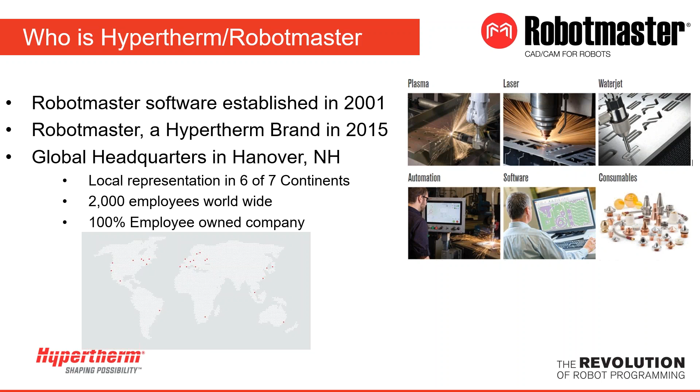Hello, my name is Greg Culp, and I'm a Senior Software Sales Manager at Hypertherm Incorporated, RobotMaster Software. Our goal in this presentation is to highlight how offline robotic programming has evolved over the years.

Since the beginning of robotics in the manufacturing space, the manual teach pendant has been a prominent player when it comes to programming and is still widely used in today's robotic market. Just like everything, there can be several advantages and disadvantages when programming in this way.

As I stated earlier, the manual teach pendant is still widely used in today's market, making it easier to find people that have a baseline understanding of this method of programming. Manual teach pendant is a highly flexible method of programming and can be beneficial for simple applications such as pick and place and material handling. Because of the flexibility of the manual teach pendant, it has allowed robotics to be used in a wide array of applications. Moreover, since the robot is being programmed online, the need to have an accurate robot tool center point or user frame is not an issue.

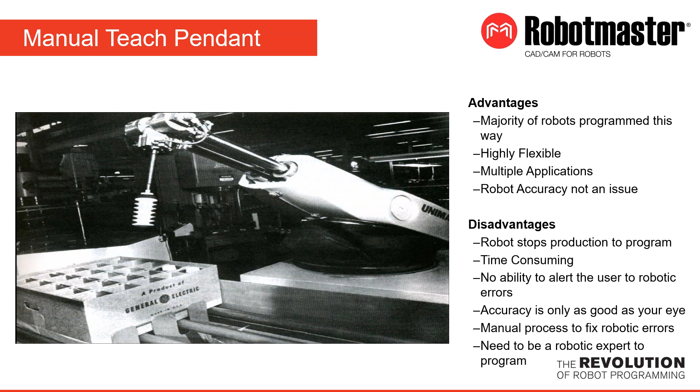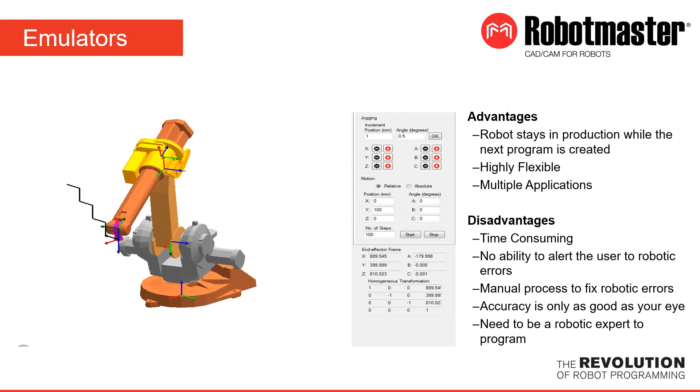Just like any revolution, progress is made with a single step, and we saw this with the creation of offline emulators. The emulator allowed the customer to keep their robot in production as you were creating the program. Even though this was a big jump in manufacturing productivity, keeping the robot in production, this is still a very manual process. The emulator is essentially just a manual teach pendant behind a computer screen.

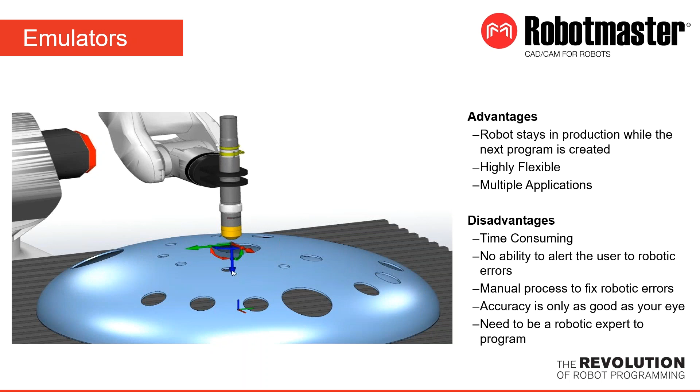You still had all the flexibility that came with the teach pendant programming, but also got some of the same drawbacks, such as accuracy issues, as your program is only as good as the person's eye. Since there's no intuitive method in this programming, people still are spending much of their time manually fixing robotic errors and needed someone who is well-versed in robotic programming to complete this task.

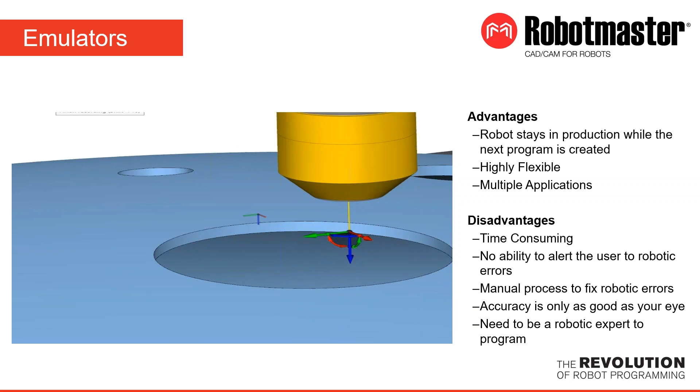One of the things that propelled the robotic programming market forward is the shift from low mix and high volume to high mix and low volume. No longer are the days where robots are mostly used in situations where we'll be doing the same things hundreds of thousands of times, but the shift to using them for runs of 1, 10, maybe even hundreds. This made the need for faster programming even more crucial.

When you are going to run the same part for a year and you're going to make 600,000 parts, it doesn't really matter if it takes you a few weeks or a month to hand program it. You still have an ROI to use the robot. Now take that same timeline for programming a run of 10 and the robot is no longer profitable. This led to the first generation of offline programming software.

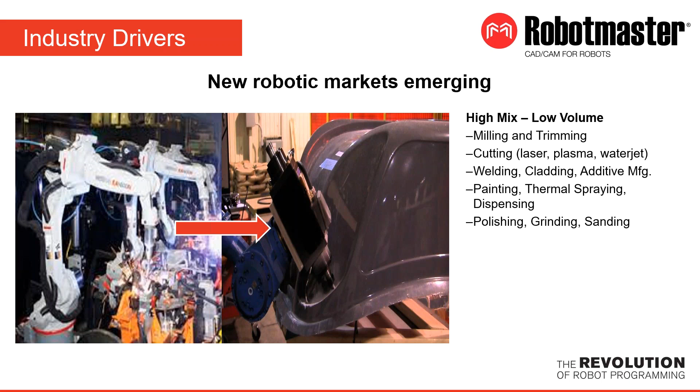Now, as robotic applications progressed and got more complex, people started to push for a simulation environment that could interact with a CAD model. With the introduction of the first generation of offline programming, this allowed you to do just that. Now you had the ability to interact with your CAD model inside the simulation, enabling you to snap a point on the model and follow the exact edge, not deviating from it because you were using your eye.

Once again, this method of programming sped up the process and kept the robot in production. This new approach was also more accurate than the emulator and teach pendant. Even though this was a big step forward in robotic programming, it was still very time-consuming.

The user was still doing point-by-point programming on the part and needed lots of back and forth between the offline programming software and the robot. There were still no alerts for the robotic errors, and you still needed to be pretty well versed in robotic programming to use the software.

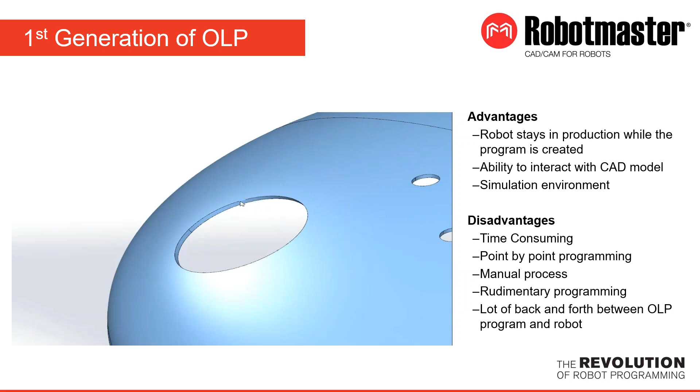The next logical step in the evolution of robotic programming was asking the question, if I can interact with the CAD model to create points on a part, why can't I use the offline programming software to create the robotic path off an edge of the part?

This second generation of offline programming software allows the user to grab the edge of the part using all the information that's already in the CAD model to get all the correct tool vectors to make the program much more straightforward and a lot more accurate.

Even though this generation of programming was a giant leap forward in time savings, it still was lacking a lot of capabilities to get an error-free program. There were still no kinematic checkers or solvers and not much in the way of collision warnings.

Like we talked about before, anytime you gain speed of programming, the cost is flexibility. This second generation offline programming software sped up the programming time for edge following applications such as trimming and deburring, but the constraint of programming off an edge cut back the total amount of applications this style of programming could do.

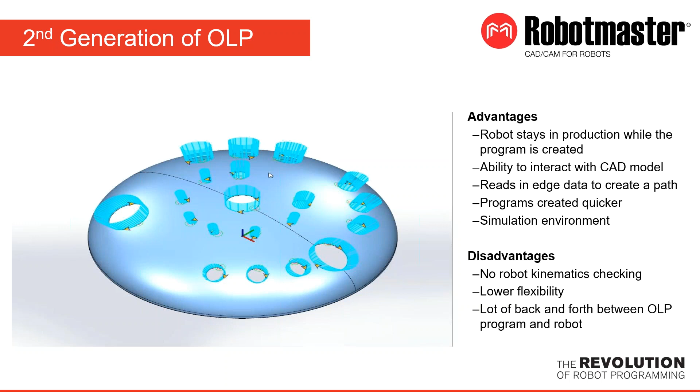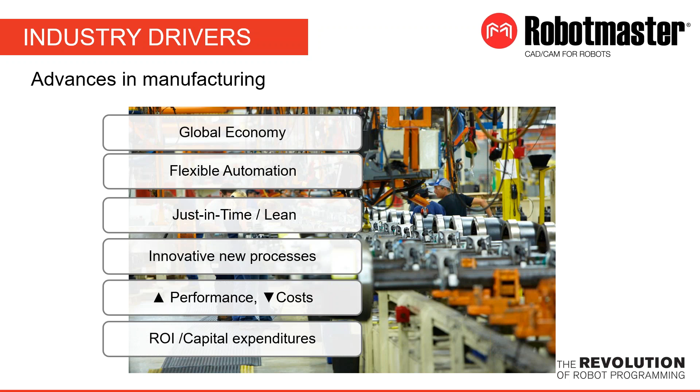There became a point when companies had several CNC machines in use, and they were starting to implement more and more robots, not just for material handling applications. Applications such as water jet cutting, trimming, robotic welding cells were being installed, and people started thinking, why can't we use our CAD/CAM software to program the robot? And this is where you started seeing some overlap between CAD/CAM software and OLP software.

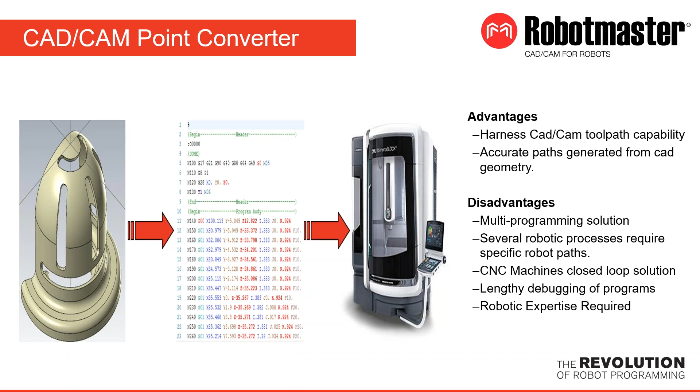The main difference between using CAD/CAM software for CNC machines and robots is CNC machines are straightforward, a closed-loop environment. And when it comes time to programming your robot, there are a lot of challenges, like singularities, reach, joint limits, and so on, which are not intuitive to identify or solve. Robots are more flexible than CNC machines, and this is a positive. But with flexibility comes more challenges, and those challenges needed a higher level of expertise in robotics.

So how this worked: in the early days with CAM software, you would create a point file. You would then take those points and read them into a point converter, which would create 6-axis robot code. You would take the robot code, run it through a simulator to figure out your errors. This was a lengthy process and took a lot of debugging to get the robot cell running. Keep in mind, you needed a lot of expertise in robotics to make this work.

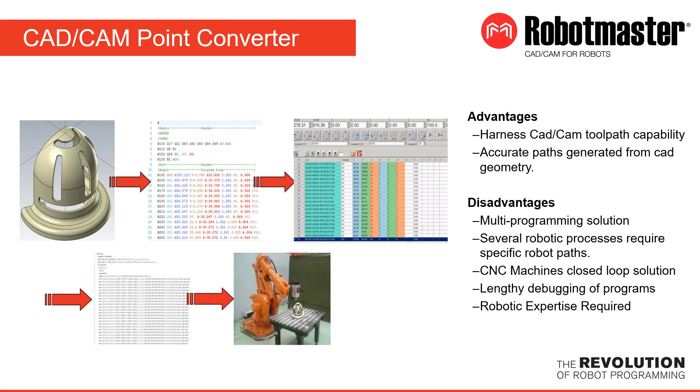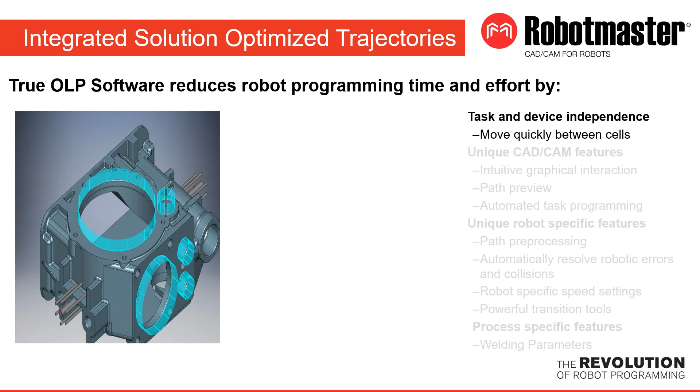After the CAD/CAM point converter approach of programming, the software transitioned into a true robotic programming solution. When looking at robotic software, there should be several factors that come into play. Your software should be robot neutral, with the ability to work with many robot manufacturers in the industry. The software should not be designed for a CAD/CAM expert or for a robotic expert. It should be designed around the process expert. If you understand your process, then programming the robot should be easy. You need the ability to move quickly from your task environment into your robot cell environment. Being able to create multiple tasks on a part is critical.

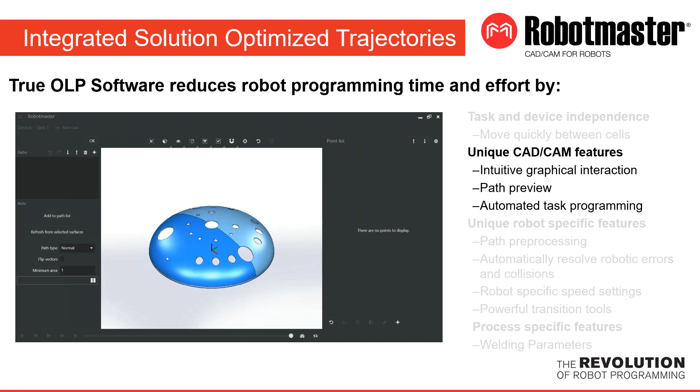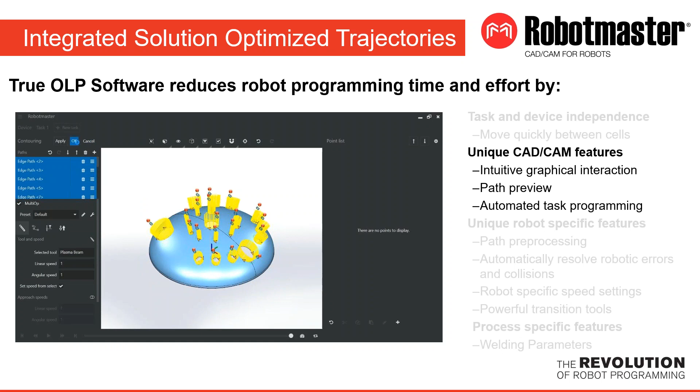In this video, it is showing automated part selection on a CAD model. Take notice of the graphical feedback from the software to the operator, having the ability to order your path to reduce cycle time. Once the path is created, you should be able to transition quickly into your device environment, simulating your robot to find out if you have any robotic issues or if it is good to go.

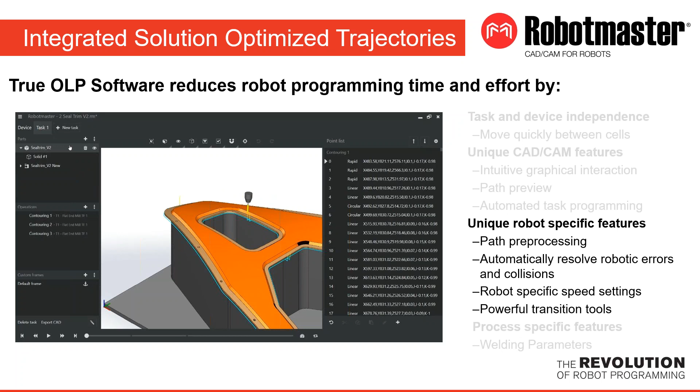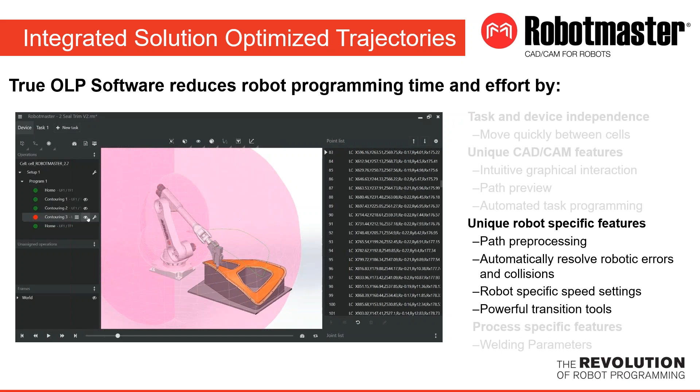Being able to manipulate your data for start point, cut direction, entry, exit, and so on is also important. You will notice graphical feedback right away. Path pre-processing lets you know there is an issue. Not being a robot expert, but a process expert, helps understand the issues. Features like inverse kinematics and engineering tools like workspace analysis help evaluate the robot cell with the part, and also having the ability to resolve your robotic issues and path corrections for an error-free program.

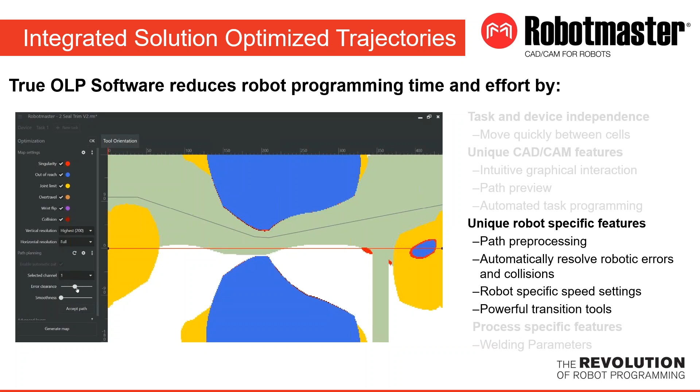These software tools are revolutionizing how robots are programmed today. So what you are now seeing is a collision between the torch and the part. In the past, the operator would go back to his parameters and start changing the data. Having a powerful interface and graphical transition tools, the operator can work directly within the robot environment to fix any of his issues that he's having for an error-free program.

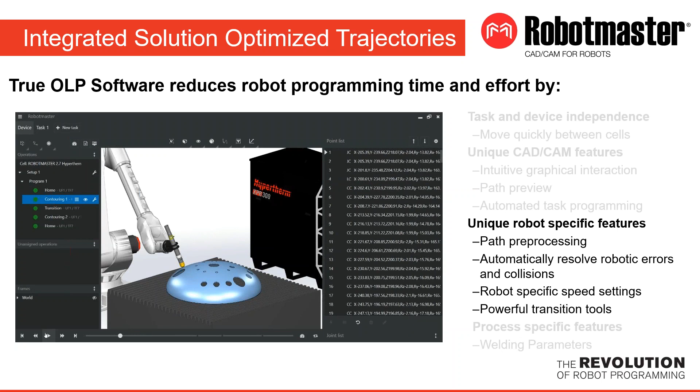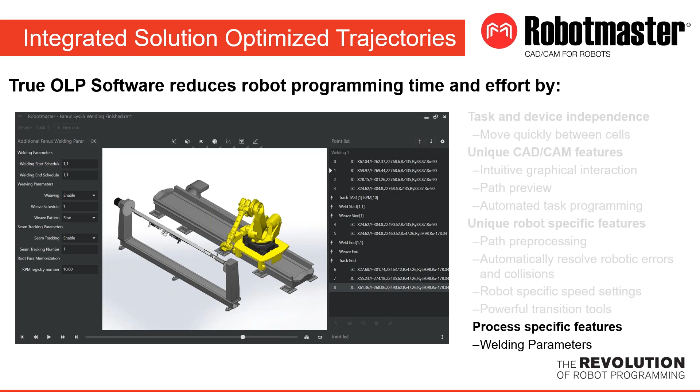And lastly, we should be looking for process-specific parameters for your application. Let's take welding, for example. Being able to input weld schedules, weaving parameters, seam tracking, and other commands determine if your software is a good fit for you and your application.

So let's recap. You now have a timeline of how software has enhanced over the years as robotic technology has enhanced. Offline programming software is another tool in the toolbox. When it comes to getting your job done, there are many factors that go into true robotic offline programming solutions.

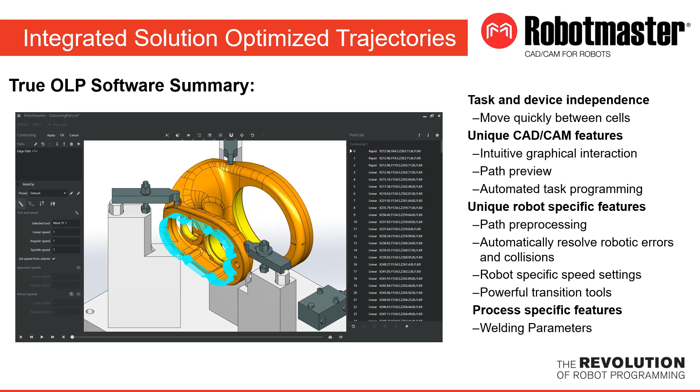The software should take into consideration the process expert. The software should not be geared to the robotic expert. You should be looking for intuitive graphical feedback. When you have an issue, you want to be informed of that issue right away, and the software should recommend solutions on how to fix those issues. And the last thing you should be looking for is process-specific parameters for your application. The bottom line, your software needs to be flexible.

A partial solution is not going to get your part programmed. I'd like to make a point that simulation software is not robotic offline programming software. I am not saying simulation software is not needed in the process, it definitely serves a purpose when it comes to robotic applications. When programming your robot cell for a specific task, you should be looking for key components like CAD/CAM tools, mathematical path optimization, inverse kinematics, simulation, and flexibility. These are the core components that make up a true offline programming solution.